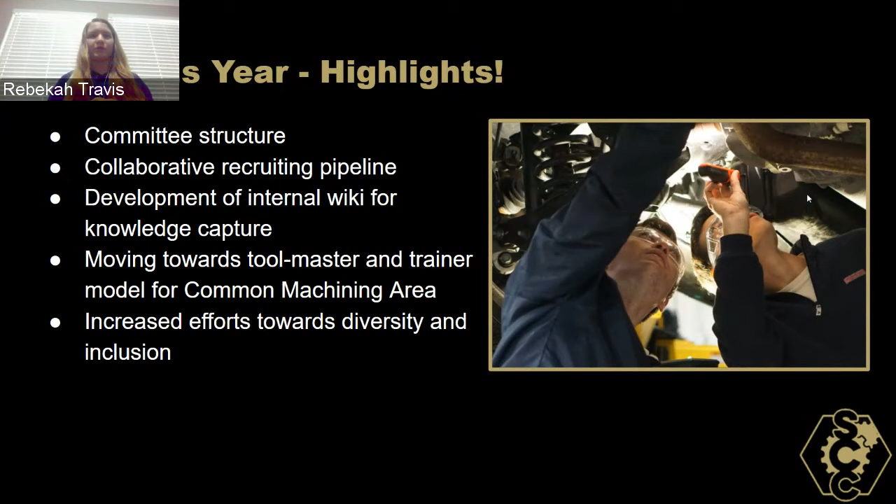And then we are also increasing our efforts towards diversity and inclusion, which is one of our biggest goals. And looking towards the next fiscal year, a couple highlights are there's a common electronics area under development, as well as collaborative resin booths for composites work and other work.

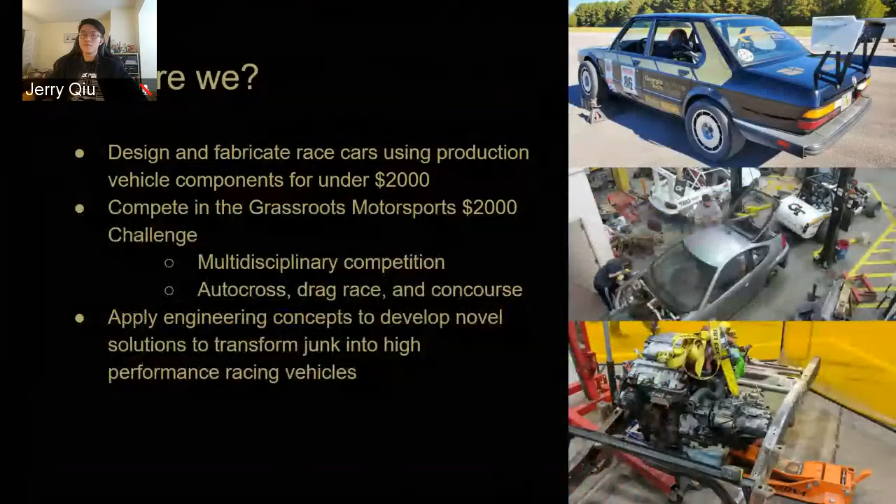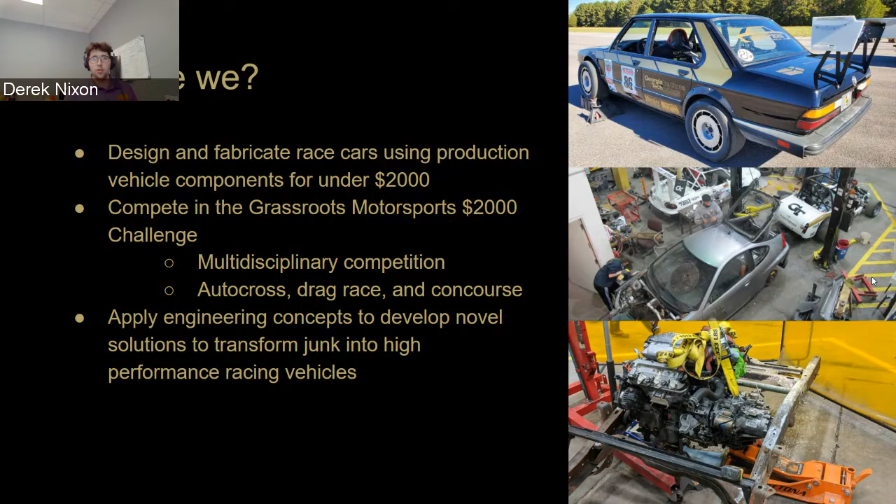So who are we? We're one of the Student Competition Center teams, and what we focus on is creating race cars from production vehicles to compete in a budget racing competition. It's put on by Grassroots Motorsports magazine every year in October. The premise is very simple: you have to show up with a car based off some sort of production vehicle, defined by production frame rails or a production unibody as your starting design, and then you have $2,000 to go and build up a car from there. So we use the various resources available to us in the Student Competition Center, as well as design and engineering expertise, to come together and try to create the best car that we can.

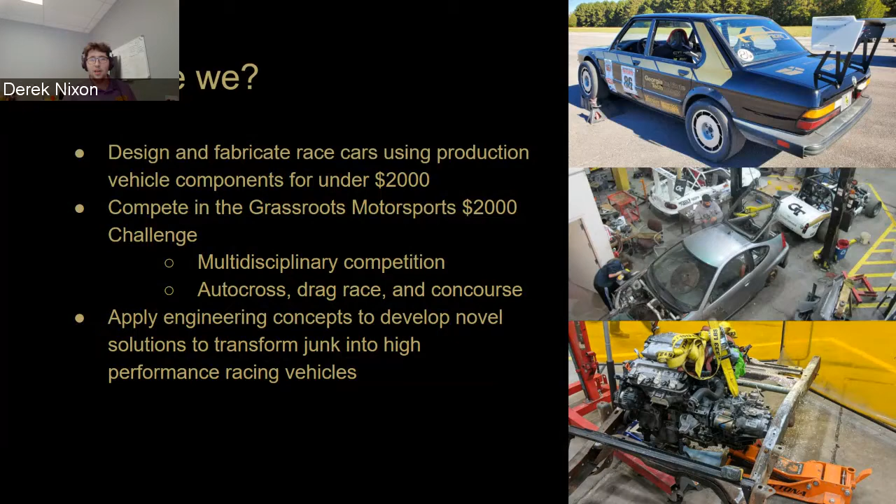So we'll go and pull engines from junkyards, buy junked cars, and use some of the tools in our common machining area to create custom suspension components and different custom components to interface all those together, to create the wackiest, best performing vehicle that we can for the least amount of money.

So what have we been up to in the last year? Last year in 2020, we took our previous car, a 1986 BMW E28, to the Grassroots Motorsports Challenge, where we placed first overall. With that car, we did a full engine swap with a custom turbocharger setup, and engineered completely new suspension for the front and rear, converting it to a more modern BMW suspension in the front with custom control arms with new geometry, and completely engineered a solid axle 3-bar linkage system for the rear to help, especially in the drag racing portion of that competition. Everything worked out really well—that was the second time we'd had that car out to competition, and it performed exactly how we wanted it to, and we were very happy about that.

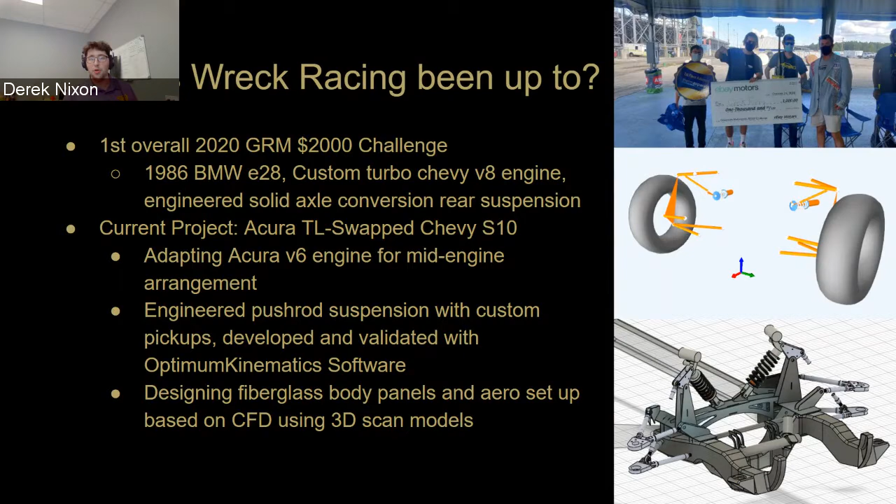So we came home, and since then we've been working on our next car, which is an Acura TL swapped Chevy S10 pickup truck—a small mini truck from the early 2000s. On that one, we're taking it completely down to the frame rails, and completely designing custom suspension on all four corners, including push and pull rod coilover setups for the front and rear, and completely custom pickup points, control arms, and everything. Essentially the only thing original on the car will be the body work and the frame rails. Everything else will have been custom designed by us and validated using different suspension design software, as well as some CFD to get a better aero setup on the car, so we're not just pushing a big brick of a pickup truck through the air.

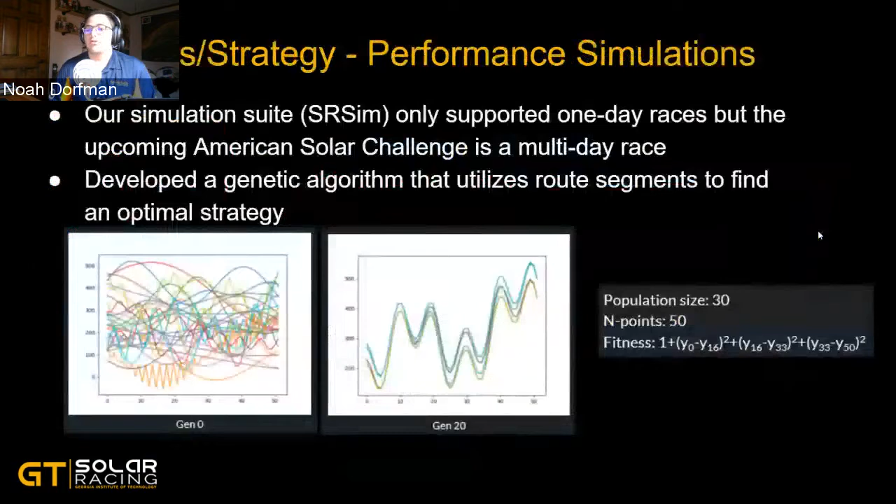Our business team just wants to say thank you to all of our sponsors. We had some new sponsors this year. We've gotten a generous donation from Haas, and we're also working towards a sponsorship with Altair, who will be helping us get a high-powered computer to run different simulations for our aero team.

And then moving on, I'm going to pass it off to Samantha Lang, our junior vehicle lead, to talk about SR3. All right, good afternoon everyone. My name is Samantha Lang. I'm a 5th year at Georgia Tech, and I am the SR3, or junior vehicle, lead.

Our primary focus with this vehicle, which was first rolled out in 2019, has been continuous improvement to prepare it for the multi-day race coming up this summer, the American Solar Challenge.

So our first significant overhaul during this continuous improvement period has been a redesign of our space frame. In 2019, at our race Formula Sun Grand Prix, our car endured a rollover event during scrutineering. There were no injuries, and the frame was not visibly damaged. However, we decided it was in our best interest to reevaluate the frame and ensure it was passing all of our test cases again.

During this period, we decided to modify the frame further by adding more members in places which would further solidify our rollover cases and pass them by both our set of regulations and by professional engineering validation. And here I would like to give a thank you to Alpha, Dr. David Smith, for getting us significant advice during this period.

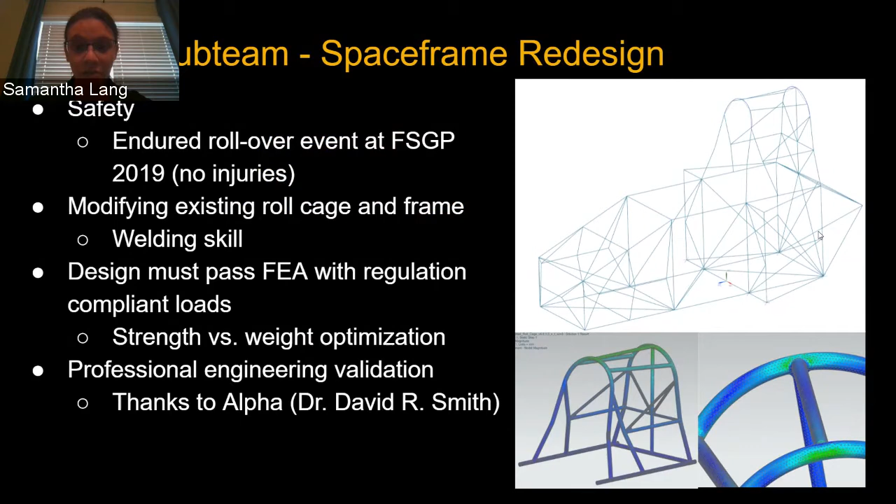So to improve this, we reevaluated the manufacturing process itself and took much longer to fabricate this new aero body. By taking it slow and steady, we were able to have the easiest pull of any carbon fiber body in GTSR history. Our surface was far smoother and better suited for our high efficiency purposes.

In the process, we also decided that our industrial design sub-team would give a new design in our vinyl wrap on the aero body. Thank you to Delta Tech Ops for use of their autoclave in order to make this process work smoothly.

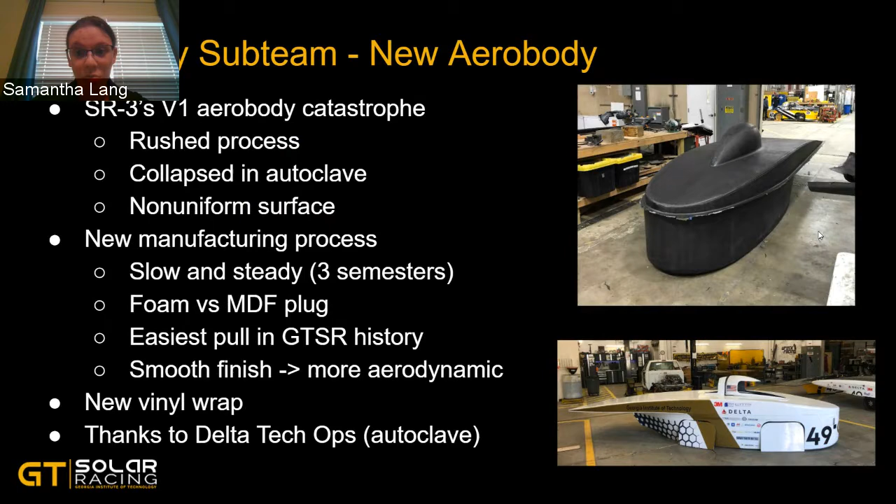Finally, on the next slide, we have our new solar array. During the process of rebuilding our aero body, we decided it was best to take new steps in improving our solar power, and we selected new solar cells with much higher efficiency. At peak point, we expect to draw 15% more power than we initially did.

In order to choose these, we went through a series of design studies to select our efficiencies and maximum power point tracker configurations, as well as cell zoning, to make sure that we were maximizing our energy draws.

So all in all, this car, despite surviving a rollover event and finishing 9th place on its first race, we thought that was significant. We now expect it to perform much better this time around, and we look forward to a double race this summer, which we hope to finish both of.

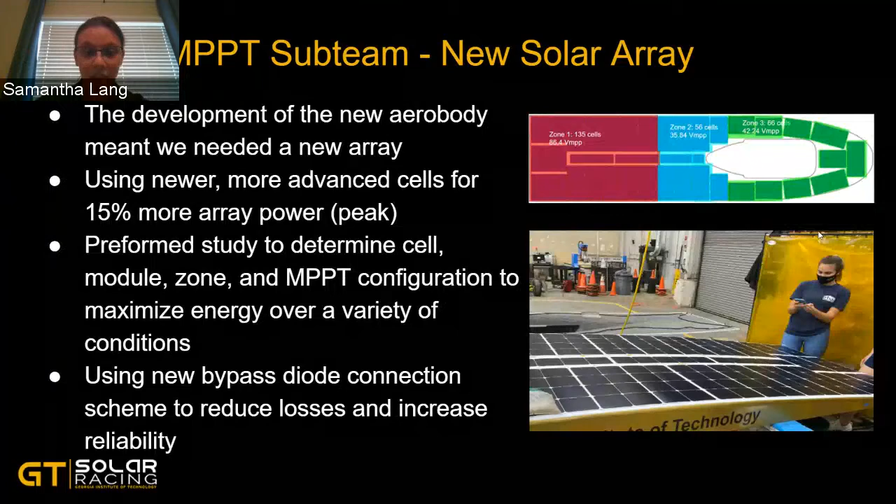And now I will hand it over to our mechanical lead, Brian Liang, as well as our electrical lead, Ben Terry, to discuss development of our next generation vehicle.

All right, hello, I am Brian Liang. I'm a second-year mechanical engineering major here, serving as mechanical lead on the team.

So for MOV, a lot of the development is actually in the early stages. On the next slide, we can see that most of the focus has been on vehicle engineering and down selecting, largely high-level analyses of how to build the car. This essentially broke down into two main tasks.

First was the research and development of the operational envelope. This means looking at data we have regarding the driving conditions, as well as regulations and other factors, to boil all that information down into braking, thermal, and crosswind requirements for the car.

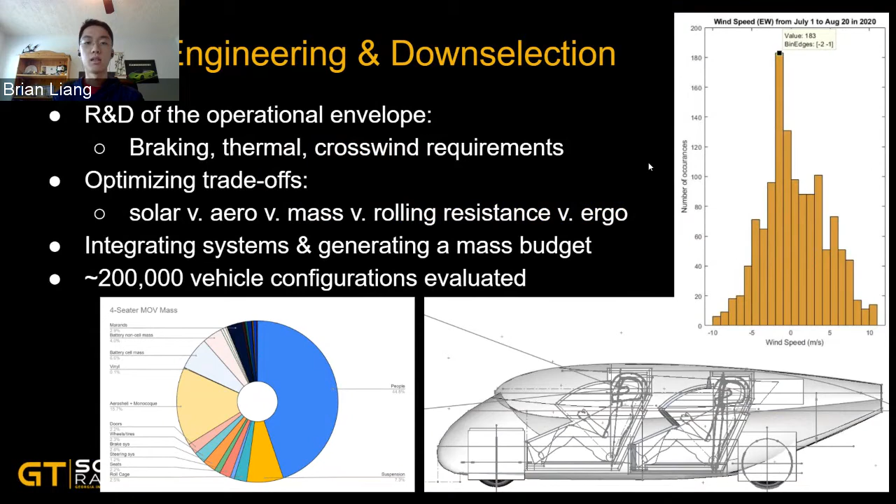Also, we ran some sensitivity studies that allowed us to quantitatively optimize the trade-offs of the different subsystems of the car—solar array area versus the drag of the aero body versus the car's mass, et cetera. This allowed us to run through about 200,000 different vehicle configurations to ensure we had a car that was, according to our analysis, the best car to build moving forward.

On the next slide, a large part of this down selection is focused on aero body development. We started off by soliciting ideas from the entire team on how we can potentially make this aero body, testing various concepts. We also had some inspiration from our industrial design team, and from there we explored the entire trade space.

We did some optimizations of many different aero body archetypes, and we also experimented with smaller details such as the tunnel shapes, tail shapes, and other details. All of this required us to build on our existing knowledge of how to run CFD and CAD using surface modeling.

We also ran some studies on smaller details that were more design agnostic, such as the door mechanisms and the feasibility of passive solar array cooling. All of this is providing information for us to begin doing more detailed design and getting ready for manufacturing.

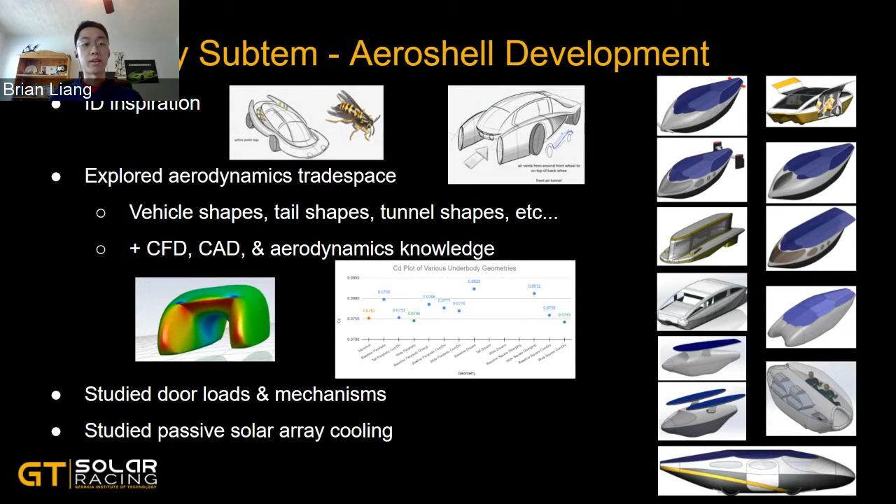And so I think on the next slide, I will hand off to Ben for the more electrical elements of the car. Thanks, Brian. Hi, I'm Ben, a fourth year EE and GTSR's electrical lead.

Our solar and MPPT subteam has been hard at work designing a much larger solar array for our next generation vehicle. It presents a lot of new challenges: much larger area, different geometries. So we've been designing and validating a suite of modeling tools we can use to quickly iterate between the solar team and the aero body team to converge on what's most aerodynamic but also generates the most power, and also work around other new features for the solar array, like where's the room for a door to hinge, and how that impacts wiring up the array, a whole host of issues there.

We've been pretty happy with the simulation results we got, and an advantage of having a car that's driving today is we can run these simulations and then validate whether they actually match what we get out of our current car, giving us a higher level of confidence.

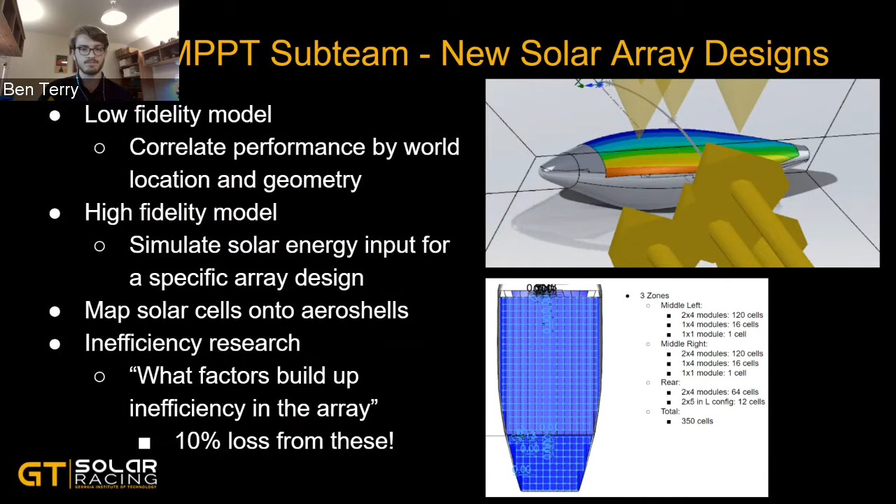Another huge change for our next generation car: it's a much bigger car for more passengers, so we need a much different way of charging, and so we need a much different battery pack design.

The battery sub-team has been hard at work building in-house tools to run simulations, mainly focused on thermal efficiency, how we can do a compact battery pack, get the heat out so it's compact and efficient, not wasting power. And also, using the geometry of the car like Brian mentioned, we're exploring the solution space there.

Some of that means instead of a nice rectangular battery pack, which is easy to design, what if we need to split the battery pack in two? That presents a whole bunch of challenges, and the battery team has been hard at work making sure we can make a reasonable design there.

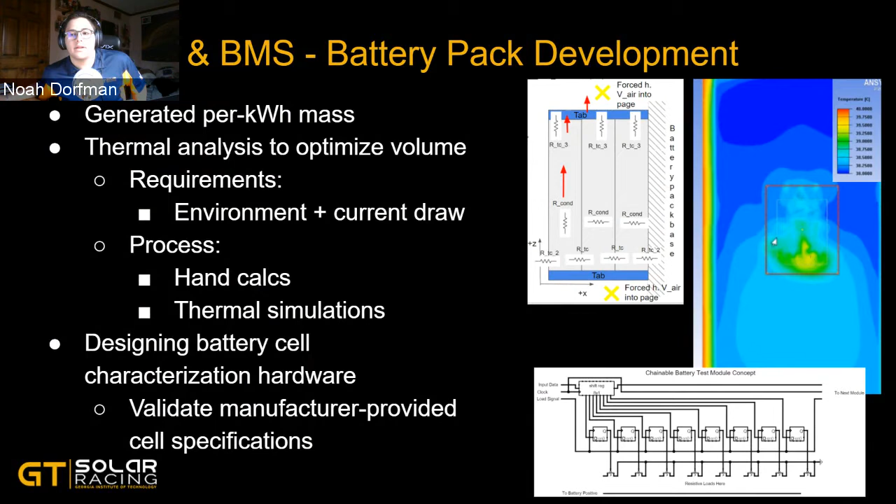Pretty cool. Noah, where does the track go this year? So we're actually going on the Santa Fe Trail in the American Solar Challenge, going from, I believe, Independence, Missouri, all the way through Santa Fe, New Mexico. So pretty cool.

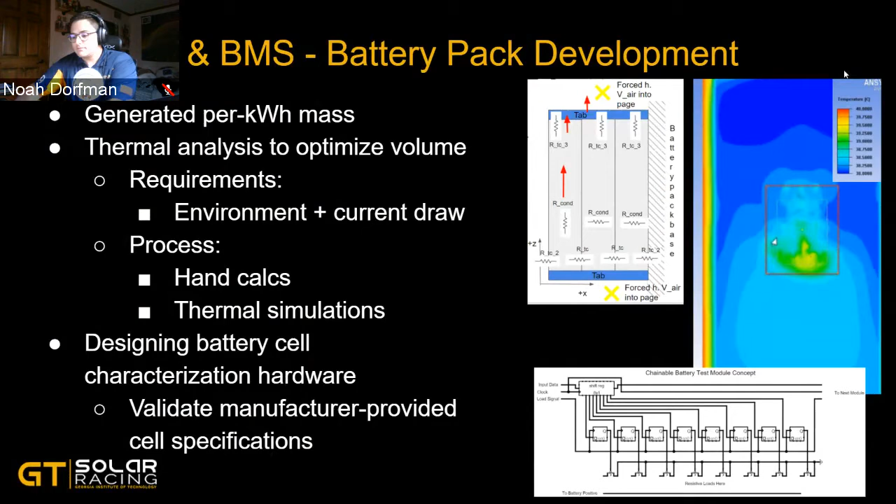Yeah, can everyone hear me? Yes, we can. Cool. Hi, everyone.

I'm Brianna Thornton, the project manager of the Georgia Tech EcoCar Mobility Challenge team. I'm joined here today with Ishan Nico, our engineering manager as well. Today I'll be going over what we're about and what we accomplished this year.

So what is EcoCar? It's part of the automotive competition known as the Advanced Vehicle Technology Competition Series. These competitions focus on things such as alternative fuels, energy sources, hybrid and electric powertrains, and driver assistance systems. During this cycle, there have been about 11 participants spanning across North America. We're one of those 11 participants.

So a little bit more about our team structure. We currently have 3 faculty advisors, and throughout year 3, this academic year, we've had about 50 undergraduate and graduate participants on the team. These students span across many majors at Georgia Tech, as well as one student from Georgia State University. We're really proud to have such a diverse team.

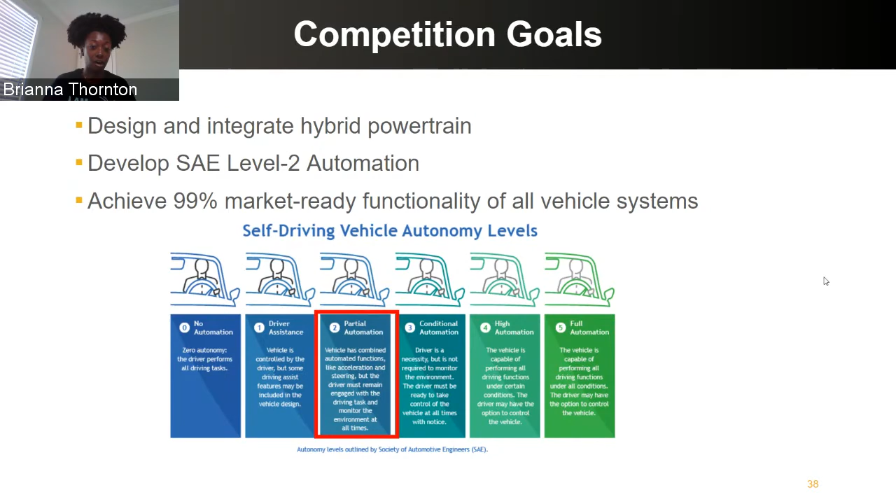To achieve those goals, we've decided to go forward with the P0, P4 HEV architecture. This architecture includes our GM Power Cube with the LCV engine and our 9-speed transmission. We have a 10-gallon aluminum fuel tank, an HEV4 battery pack, and we have the P0 and P4 system. The P0 system is on the front axle, encompassing the Denso motor as well as the Rinehart inverter. Our P4 system on the rear axle encompasses a Magna E-Rad motor and the Magna dual inverter.

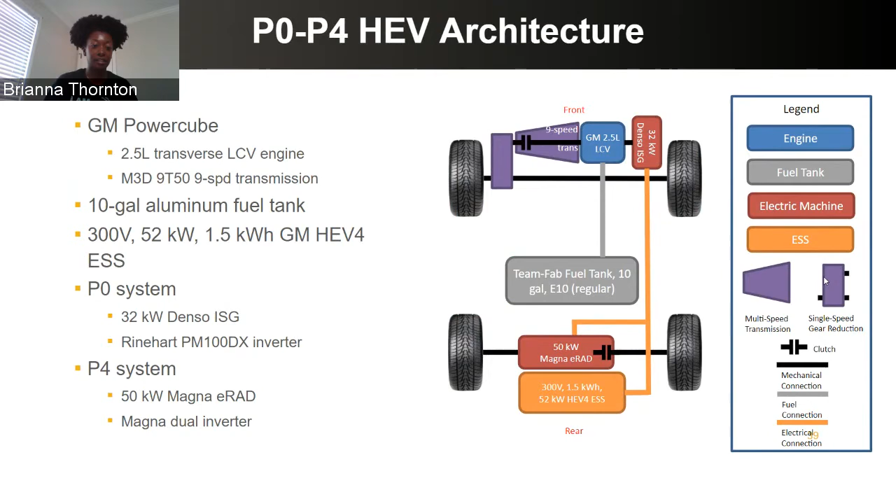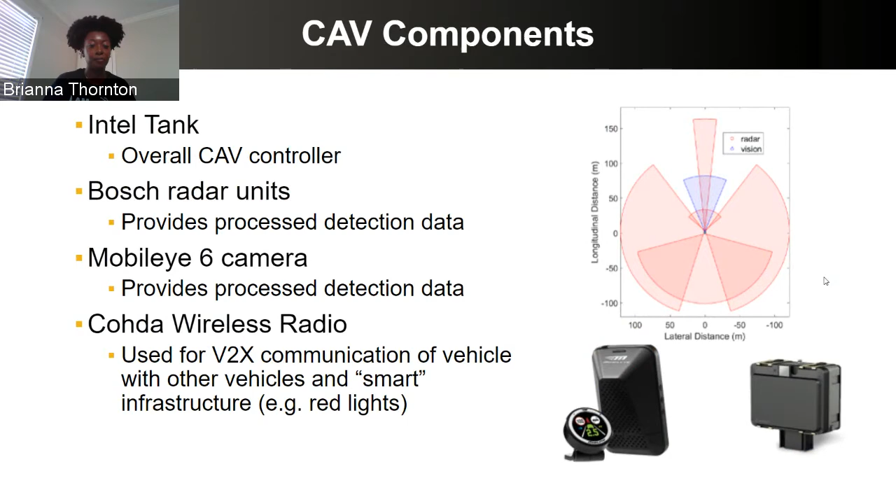As far as our CAVS component to achieve those automation features, we have the Intel tank being the overall CAV controller. We have the Bosch radars as well as the Mobileye camera that provides object detection data. We also have the Cohda wireless radio, and that sums up our CAVS components.

So what were the goals and what did we accomplish this year? Well, we completely and reliably integrated all of those vehicle components that I mentioned earlier. We were able to have a fully functional vehicle propulsion system with basic energy management strategy implemented. We're also working on updating our CAV controller with basic functionality and fault mitigation.

We are still currently running in the competition. The competition is not over this year. We still have a bit more testing to go up until the end of May, and then in June will be the award ceremony. So hopefully we will place really well during that time.

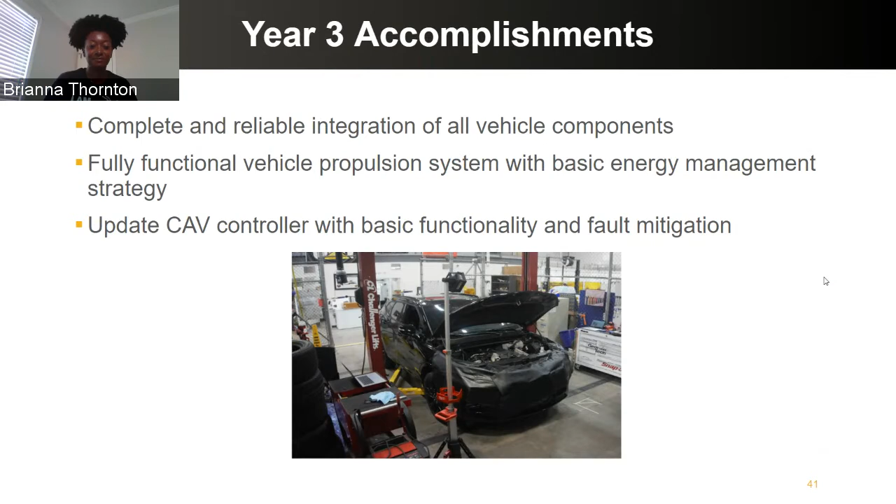As far as EcoCar's impact on its members, it provides a unique opportunity for industry-level automotive experience. Our students get into the process of creating a consumer-ready vehicle, following along with GM's own vehicle development process, so they get real-world experience that's really unique to this opportunity. It also provides employment opportunities for our students—a lot of times they get internships or even full-time positions through the sponsors that help us achieve our competition goals.

Overall, it's a very valuable opportunity for hands-on experience, and the unique aspect is that it's so multidisciplinary, spanning over a course of 4 years. You get to work on the design phase, the integration phase, the testing phase, and the refinement phase. All of that is really important for real-world vehicle development.

And with that, I want to thank our various sponsors who provide the tools and equipment necessary for us to achieve all of the goals we've been able to so far. So thank you so much, we really appreciate it. And now I'll open the floor to any questions.

I'll throw in a quick question. What do you mean by year 3?

Oh, sorry. So the EcoCar Mobility Challenge spans over 4 years. We're currently in the 3rd year of that competition, the 2020-2021 academic year. This year was primarily focused on integrating the components as well as testing those components to make sure they're fully operating and communicating well with each other.

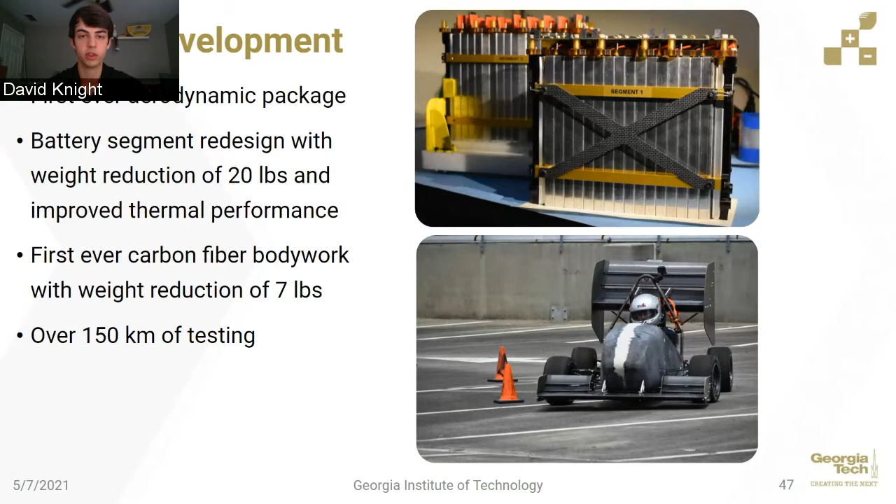This year we've had quite a few very exciting updates to our vehicle. This year being the first year we've developed an aerodynamic package, and you can actually see in the picture on the right - it's fully manufactured and mounted on the vehicle. We've been testing it for the past couple of weeks.

David mentioned earlier that we're going to FSAE Nevada, which is very different conditions compared to the competition in New Hampshire that we used to go to. So we really focused on modeling and understanding the thermal components of our vehicle, such as the battery pack. We redesigned the battery segment to improve the cooling and also shave a lot of weight so that the addition of the aero package wouldn't hurt our performance.

You can see in the picture on the right, it's our new fully manufactured battery segment, which contains 18 lithium polymer cells, and we have 4 of those in the accumulator, totaling a voltage of 300 volts. It's also our first year when we manufactured a carbon bodywork, again to save some weight - it saved 7 pounds.

We also focused a lot on testing this year, since testing the vehicle is one of the most important components of this competition and allows us to gain a lot of performance by tuning the car and training our drivers. We already completed over 150 kilometers of testing, and we plan to test a little bit more before we go to the competition in about a month.

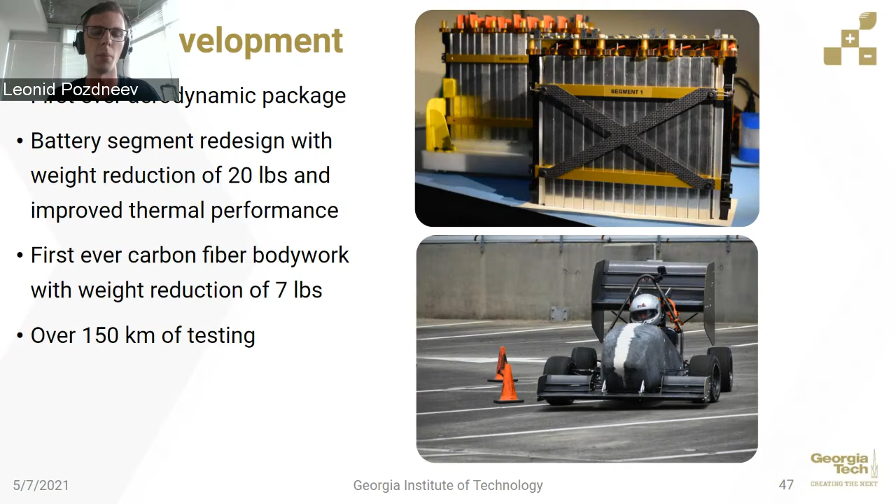The performance of our current vehicle, H205, its curb weight is 378 pounds - only 10 pounds heavier than our previous vehicle, H204. However, it has a full aero kit, and it has a higher performing battery pack. Its 0 to 60 acceleration is in about 3.5 seconds, so it's a fairly quick car.

We've measured sustained lateral accelerations of 1.9 G thanks to our optimized suspension to maximize mechanical grip, plus our aero package. The overall power of our motor is about 100 horsepower, and it produces about 710 newton meters of torque at the wheels, which is about 160 newton meters at the output of the motor shaft. Our battery pack is 4.7 kilowatt hours, 300 volt, and the power to weight ratio is 0.25 horsepower per pound.

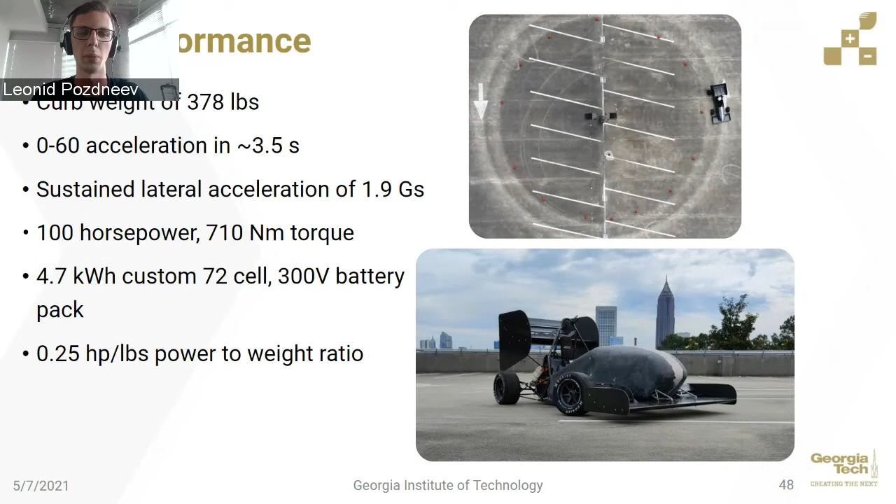I'm handing this over to Arvind to talk about our team training. At HyTech Racing, we take new member training and community engagement extremely seriously. Normally, before COVID, we hold a series of hands-on workshops and training sessions throughout the fall so we can get our new members up to speed.

However, now because of COVID, we had to adapt. So we created a fully virtual training program this year with 26 training recordings spread over the semester that had 25 hours of training material. This covered everything from overall details on how our car works, how our team is structured, to very specifics like circuit board design. We got feedback from our members that these trainings not only helped them become more involved, but also succeed.

In addition, we took shop access and trained new members how to operate equipment such as the CNC mills and lathe mentioned previously as part of the CMA. We also worked on doing community outreach, holding community workshops including how to build an electric race car, where we talk to new members and the general public about our team and what we do. These info sessions and tabling help us advertise, and we also do social media outreach.

Building a race car is no small feat. It takes a lot of money, and we thank our generous sponsors who help us get all the way there. Specifically through SGA we get yearly budgets and semesterly bills, but we also have sponsors who give us both monetary support and in-kind parts donations that we're especially thankful for because they help us build a race car every year.

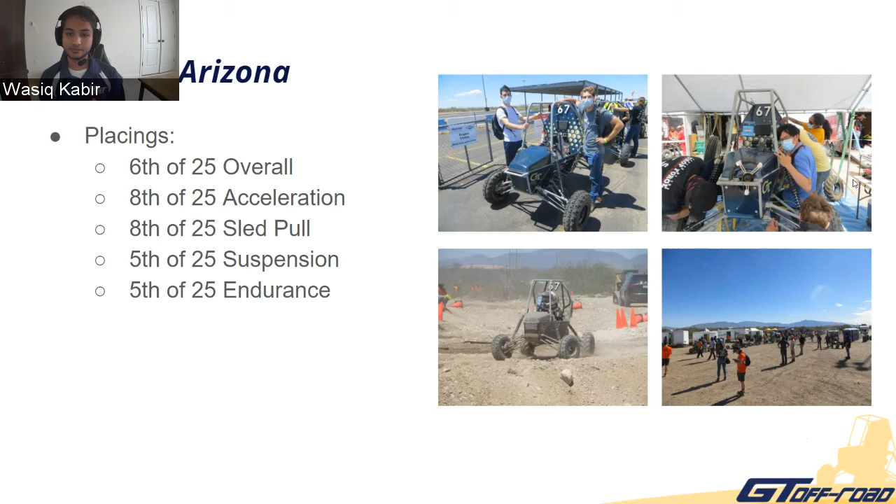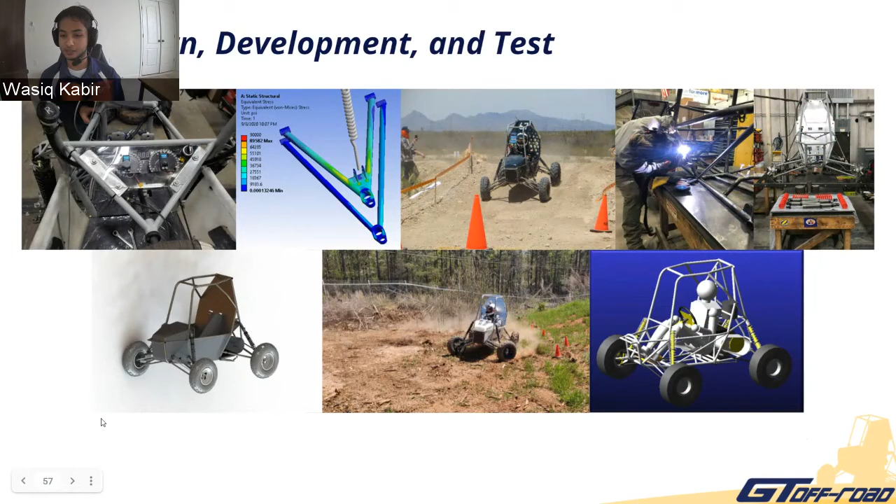We're looking forward to Louisville, our last competition coming up, and we're looking forward to a strong end to our season, especially with that second place finish in the design event. So looking forward to it.

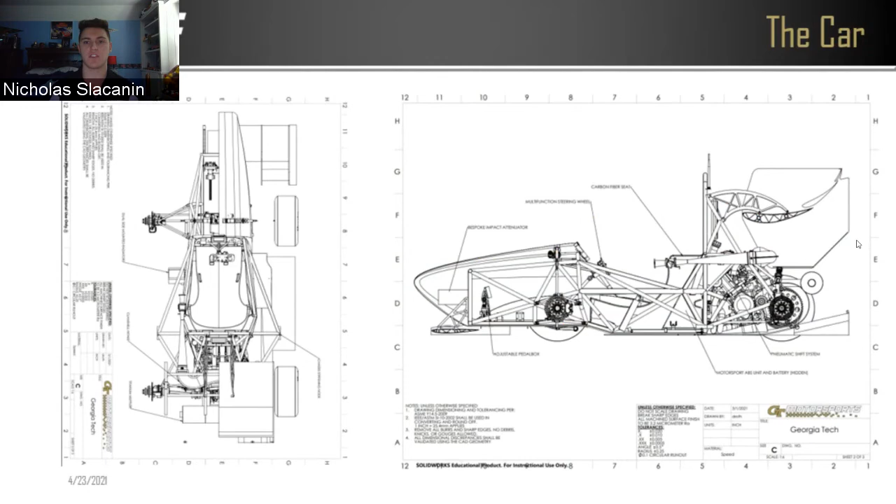So this car was an iteration of what we were supposed to compete with last year. This year we have car 73, and many of the design changes that we've included into this car we're going to go over, many of which are seen in our aerodynamics package, as well as some of the stuff we've done with our engine and chassis.

So I'm going to go ahead and toss it over to Marvin, and he's going to explain what we've done with the design and how we've exactly moved it into what we have for this year.

All right, thanks Nick. Yeah, just like Nick said, a lot of the largest components that we've changed for this year are part of the Aero package. So essentially in Aero, everything is designed through iterations in CFD. This means we start with a general idea of what we think will work, and we make a number of design changes until we're happy with the results.

This is done for each individual element in isolation, by themselves in the simulation, and then they're added to the car to see how it performs, and this way we can see how it works relative to everything else. For example, this front wing, each individual element was tested and then put together, and much of the interactions are determined later. So for example, the middle of the front wing, we made so that it directs airflow to work with the under tray, which is a new addition this year.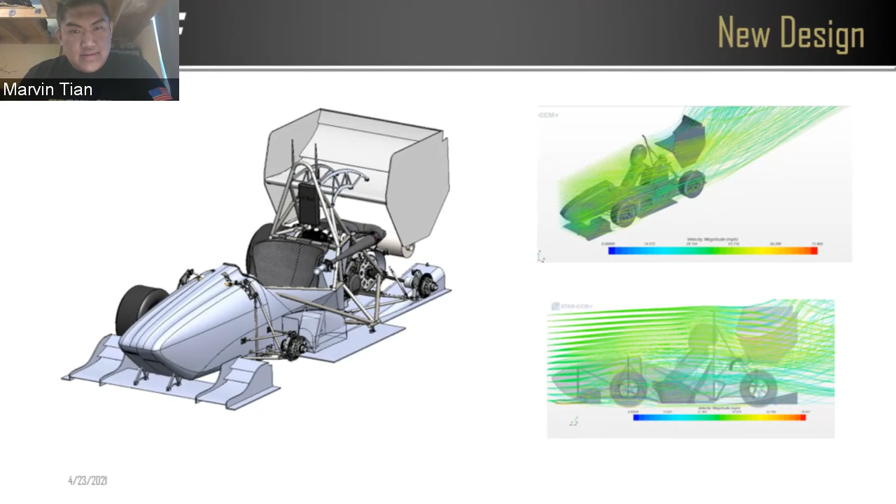We try to manufacture a lot of the parts in the shop, but we also have places like Delta Tech Ops who generously allow us to use their autoclave, which makes parts such as this floor panel possible—these large parts wouldn't be feasible otherwise.

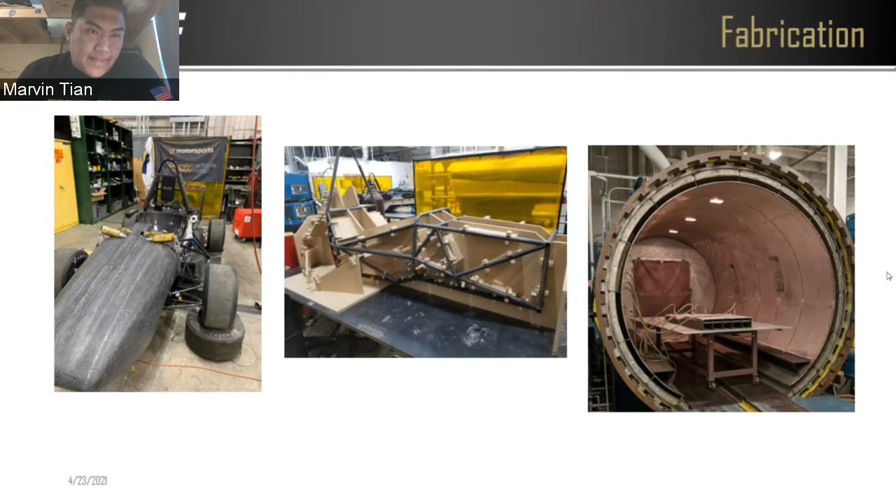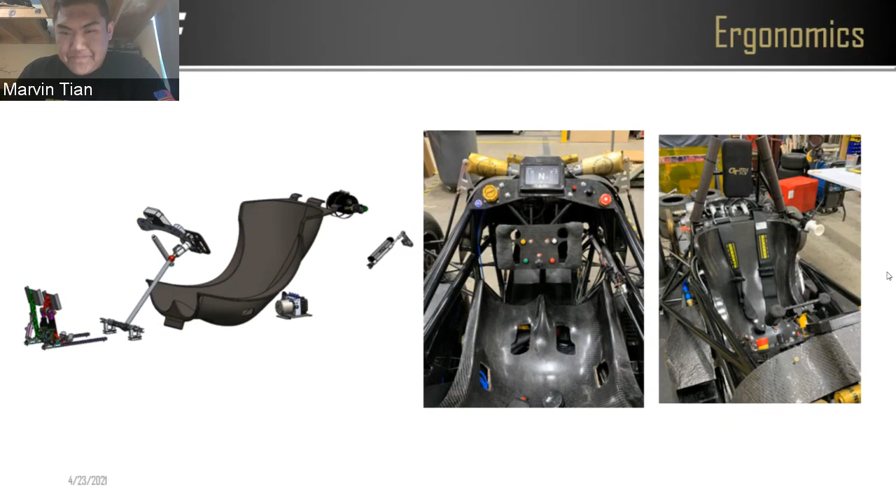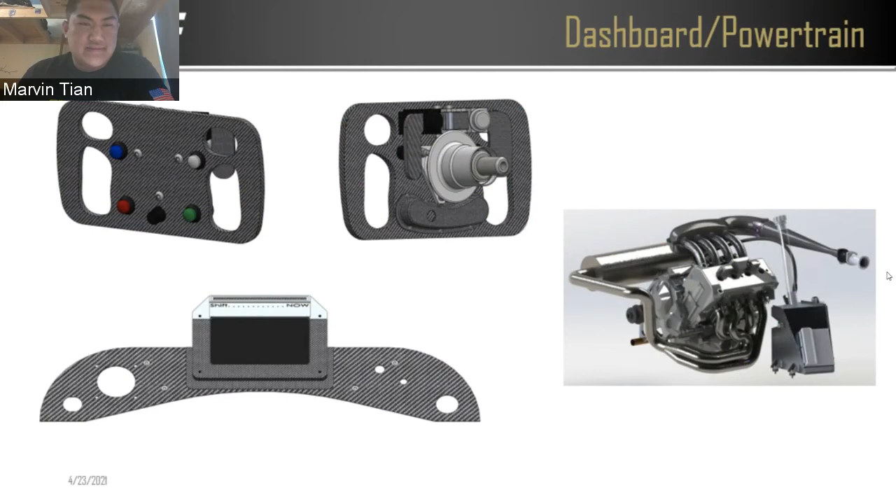I'd like to touch on Marvin's extreme capability and what he's been able to learn throughout the entire year—we really try to influence our first years to follow this same path of integrating themselves within the team. Just to briefly touch on some other additions to the car: much of our powertrain continues to use a 4-cylinder Honda CBR motorcycle engine as our main source of power. This year we wanted to fine-tune the engine to be as efficient as possible, and we've achieved one of the lowest idling RPMs we've ever had, which is an extreme accomplishment.

Along with much of our aerodynamic pieces, our side pods drastically reduced in size, which reduced our overall weight—a very good achievement in terms of efficiency and making the car as quick as possible.

Next, I'll go over our team image and the goals we have going into the future. Much of our team is focused on building a future outlook that makes the team as bright as possible, starting with developing a lot of our new members into great leaders for future years. It's all about promoting the team and creating a professional team image.

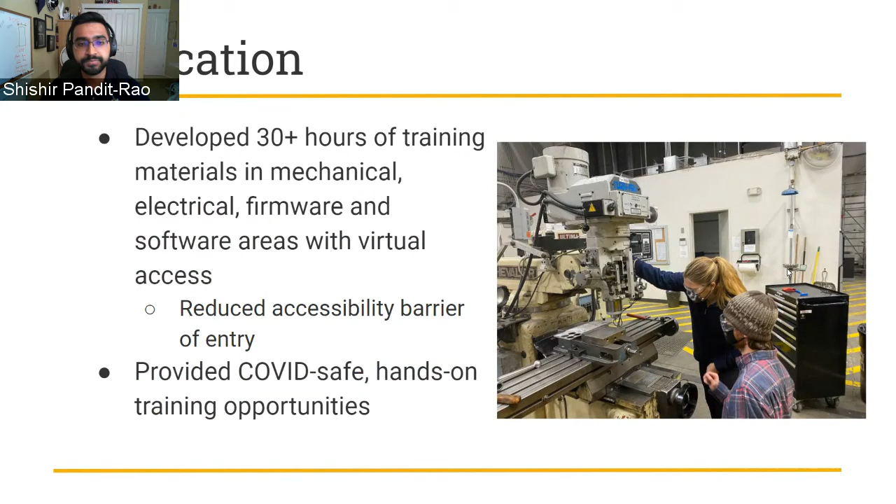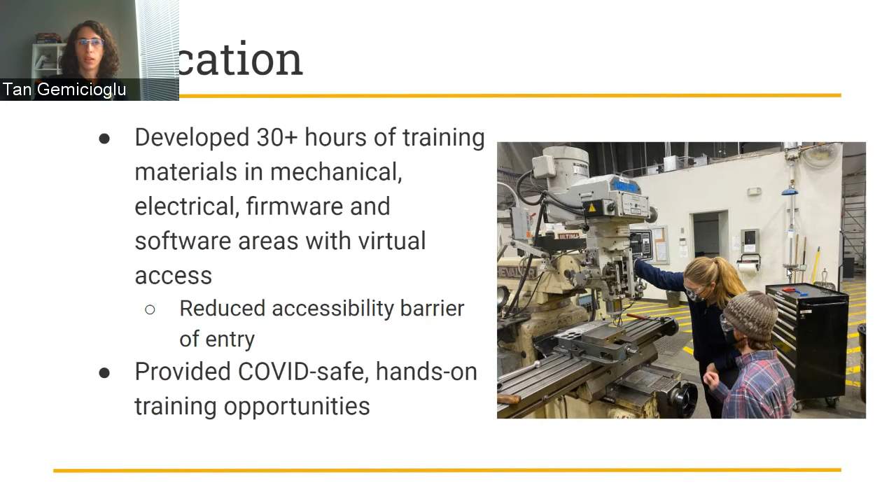However, in order to do this, education is a very crucial element. Tan, would you like to talk a little bit about our educational materials? At RoboJackets, we take a lot of pride in keeping our education open to the entire Georgia Tech student body. For this, we've adapted really well to the virtual environment of the pandemic, and we developed YouTube playlists for each of our disciplines that were publicly available to both Georgia Tech students and beyond. We also set up Microsoft Teams in addition to these, maintaining them as courses for all of our new members to take and learn alongside each other. We also provided opportunities to come to the shop and still get some hands-on experience working with our machinery. And we'll leave it to Shishir for outreach.

As mentioned earlier, one of the major things we do here at RoboJackets is the STEM outreach element. One of our major annual events is the FIRST FRC kickoff. This last fiscal year it was virtual with over 200 attendees, where we hosted informational sessions with our members as well as high school students to give them context about what robotics is after high school. In addition, we've worked with elementary schools at their career fairs to explain the functionalities of robotics in the real world.

One of the other major events this year, all virtual of course, was using Lego Mindstorms kits to help explain neurological concepts for Brain Awareness Day in easy to understand manners for middle school students. It really showed how robotics could be used to lower the barrier of entry for education. Pre and post COVID, we have a lot more outreach events that we do. We work with high school students to provide technical design reviews, and we also work with our communities for many more presentations, which we plan on continuing after this pandemic has subsided.

Now I'd like to go into the technical developments of each of our 5 teams that I mentioned earlier.

Our first team is BattleBots, which focuses on combat robotics. This is our largest team, focused on creating a multitude of different robots of different weight classes that go through the entire process of conceptualization, design, and development to succeed in the competition arena.

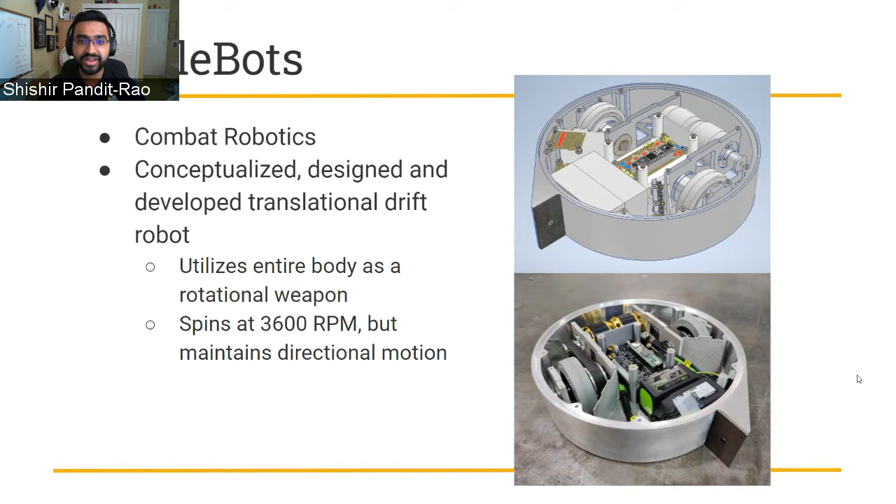Another main element of this program was ideating, creating, and hosting an in-house competition entirely from scratch. After COVID-19 took away our external competitions, we wanted to ensure members had a solid competition environment while maintaining COVID safety. We created about 7 small 2-pound robots, keeping groups small and COVID safe while providing a hands-on environment to help new members develop technical skills, culminating in a competition with about 20 people over an entire day.

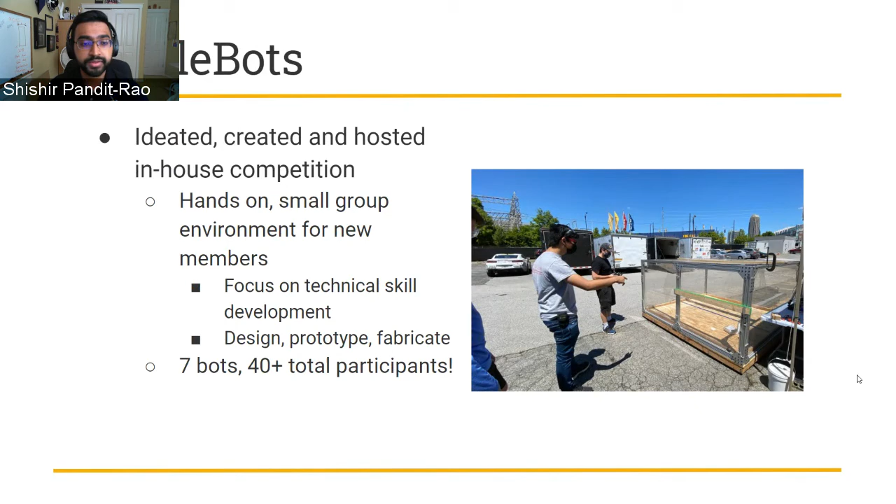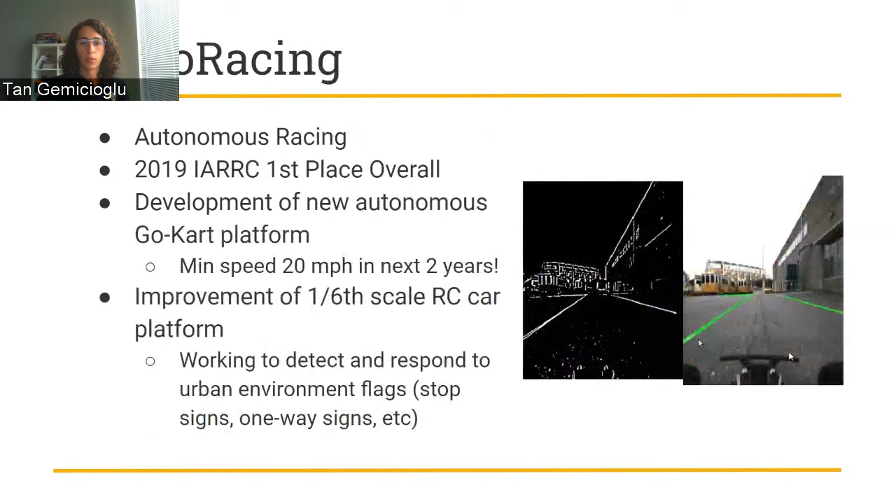One of our other teams, the autonomous racing team, was very successful in its previous competition, taking first place overall in their 2019 competition. This team has been focusing on developing an entirely new autonomous go-kart platform.

This platform aims to hit minimum speeds of 20 miles per hour within the next 2 years—basically, the entire course has to be completed without going below 20 miles per hour, entirely autonomously and in head-to-head competition. This team is working very hard on this development, ensuring that the software stack is robust and able to handle this process.

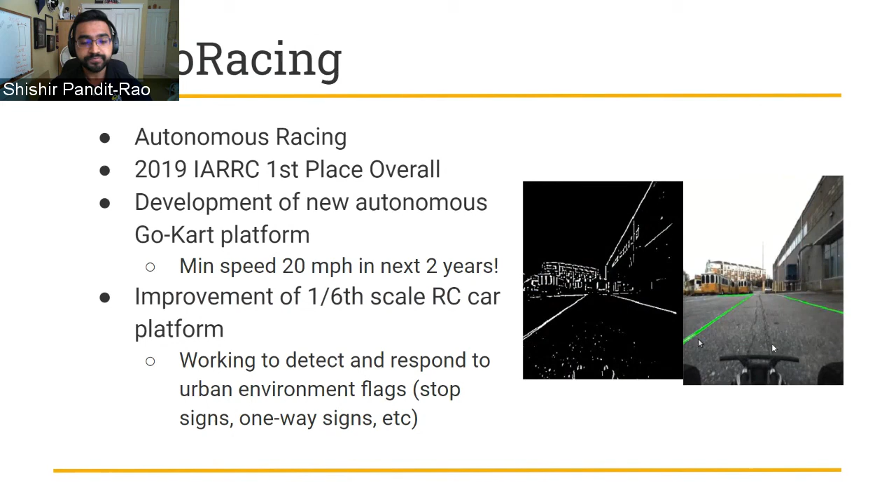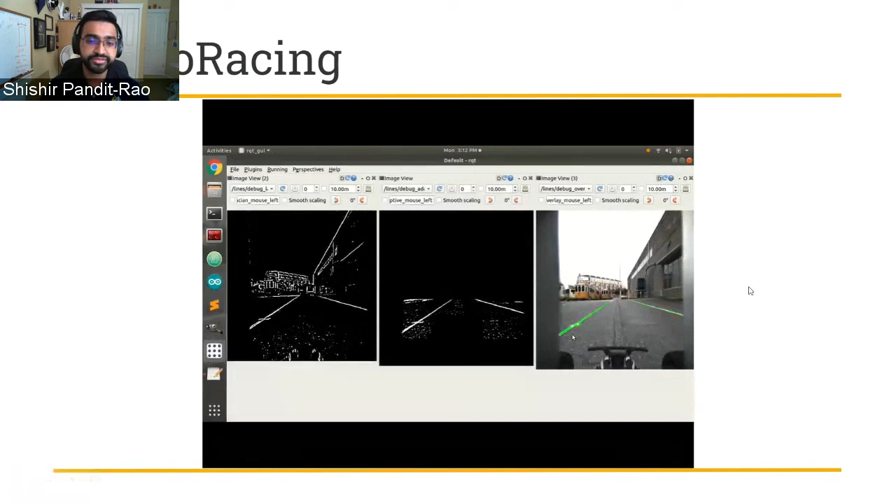In addition, Robo Racing is working on improving one of their existing robots, a 1/6 scale RC car, working to autonomously detect and respond to urban environment signals such as stop signs, one-way signs, and signal lights. Next, we have a brief video about the image recognition platform from the external camera and how that was interpreted by the sensor stack and software stack.

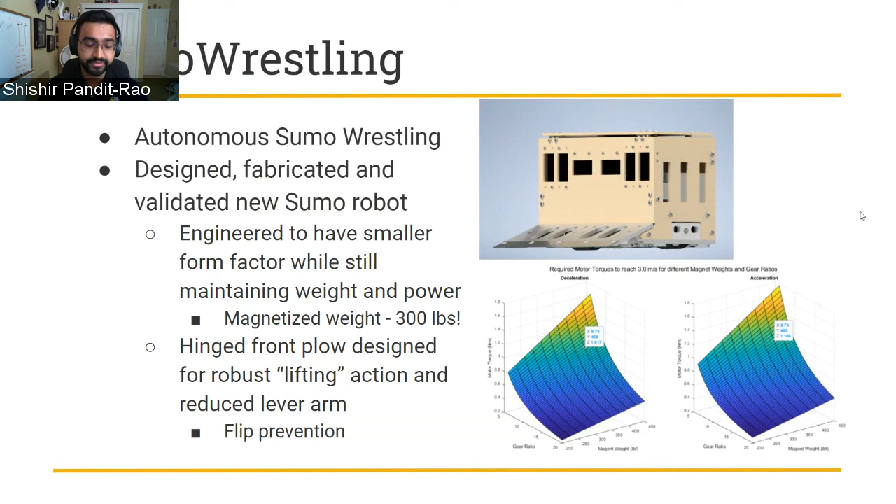And finally, we have our newest team, Robo Wrestling, which focuses on autonomous sumo wrestling. This team has spent this last year designing, fabricating, and validating an entirely new robot, engineered to have a smaller form factor while still maintaining its current weight and power. This robot, although it's about 8 inches by 12 inches by 8 inches tall, has a magnetized weight of about 300 pounds. So if the magnets are on, you can't really lift it, and it's a very strong and powerful platform that our team has been focused on developing a workflow towards ensuring their design components are robust and able to prevent flipping and reduce the lever arm as a whole.

However, there was a lot of information given, but the simple truth is none of what we just mentioned could happen without our sponsors. We have over 20 sponsors who have provided us a lot of support, both financially and in kind. We would like to provide our most sincere thank you for everything our sponsors have provided and the opportunities they have given us to be successful this past year. Our relationship with our sponsors is very symbiotic because it allows them to really have the ability to interact with our members, and it allows interaction between our members and themselves in terms of providing opportunities for internships and employment for the people of RoboJackets.